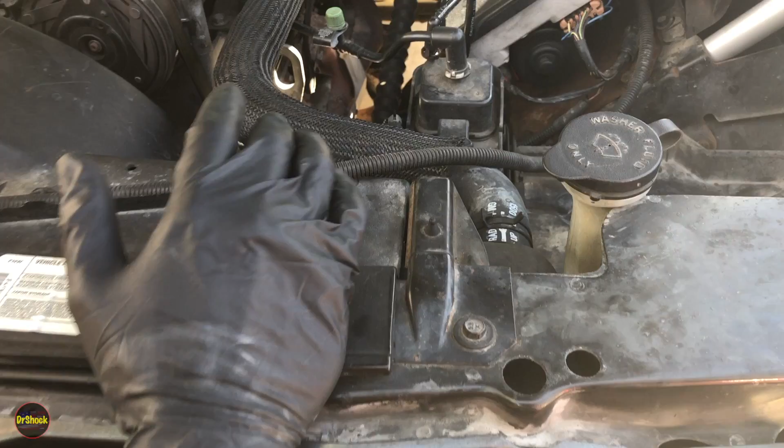All right, guys, today we're going to continue with some of the oil leaks on this Vortec 5.7 liter V8 sitting inside this 98 Chevrolet Cheyenne. What we're going to take care of today are leaking oil cooler lines. If we come over here on the back side of the radiator, you can see what I'm talking about here. So we've got this line that comes out the top of the cooler, and it goes down. You can see it's very heavily caked up with oil.

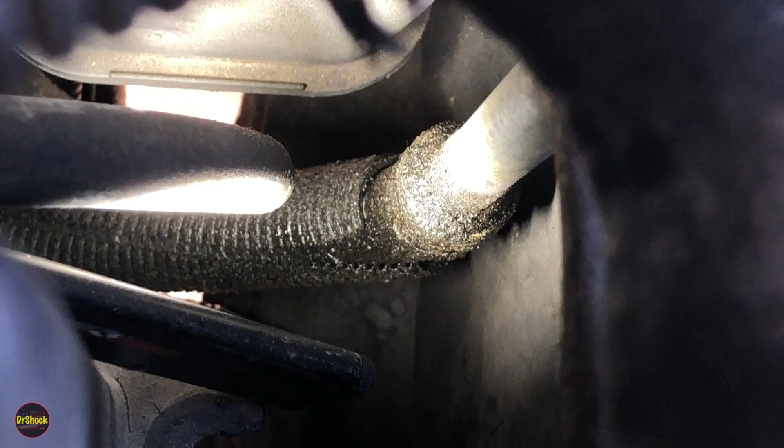There's obviously no other source of oil in this vicinity, so this is 100% a problem with the crimp end of this hose. And of course, I don't know how well you can see it, but this all runs down to the bottom part of the area, and then ends up getting blown all over the engine by the fan. The bottom line is also suspect. Now, what I like to do is replace these in pairs, even if I don't see any direct evidence. So I got enough direct evidence to condemn this one. We're going to end up changing them both.

In order to do this repair, first thing we're going to do is reach back here and disconnect our hood lights so we don't run the power down, because we're going to have the hood up for a considerable amount of time here. I'm going to go grab a 10 millimeter and we're going to take out the 10 millimeter bolts that are up on top here. If we look down inside, we see that there's a couple more 10 millimeter bolts, one here and one over here, I believe. Looking for it. Maybe not. Yep, it's broken off. So there's supposed to be one over there.

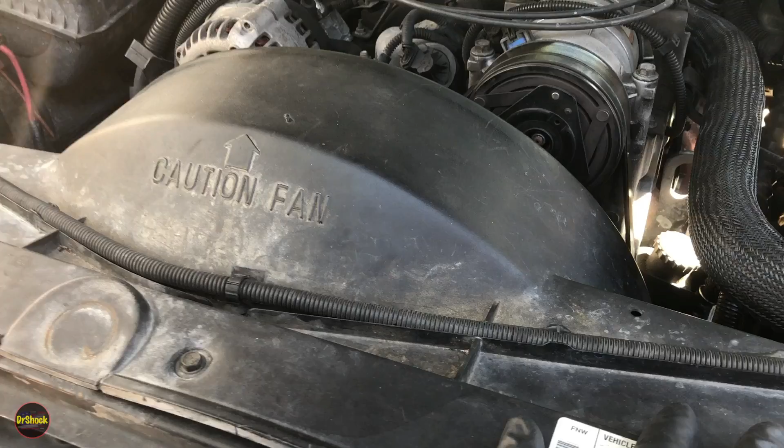That's the other thing we're going to be doing today, is we're going to toss this particular upper cracked fan shroud. It's cracked here. It's missing that bolt over there. I think it's probably missing one on the other side. And we've got a much nicer one from the salvage yard that we're going to replace it with. So I'm going to go grab a 10 millimeter and a small flathead screwdriver so we can pop this clip and we'll get started.

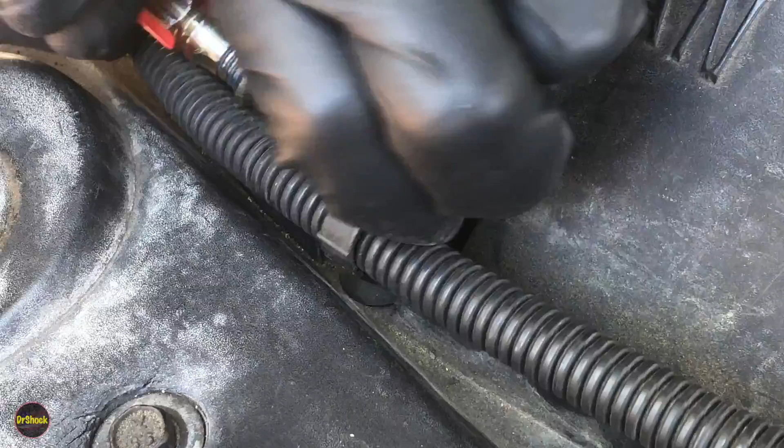All right, so we start with removing this battery cable, popping it out of the upper fan shroud molding. And then we take a small flathead screwdriver, and on these clips, we just kind of work it in here, twist and lift. Right, that's all you have to do there. You can put this guy back behind the AC line right like that. Then we'll take our 10 millimeter and take these bolts out.

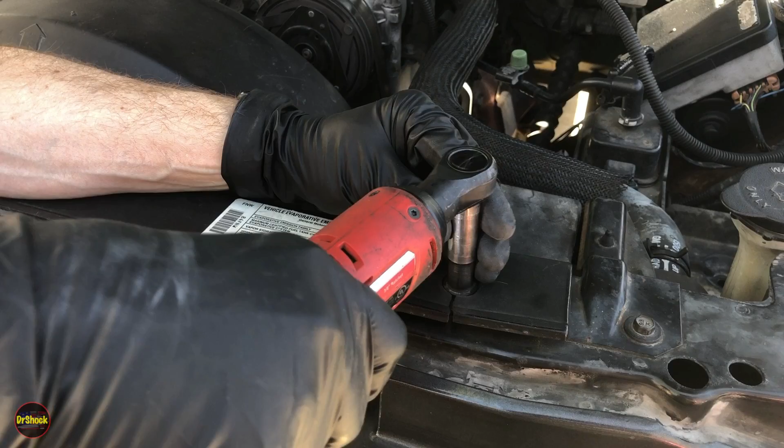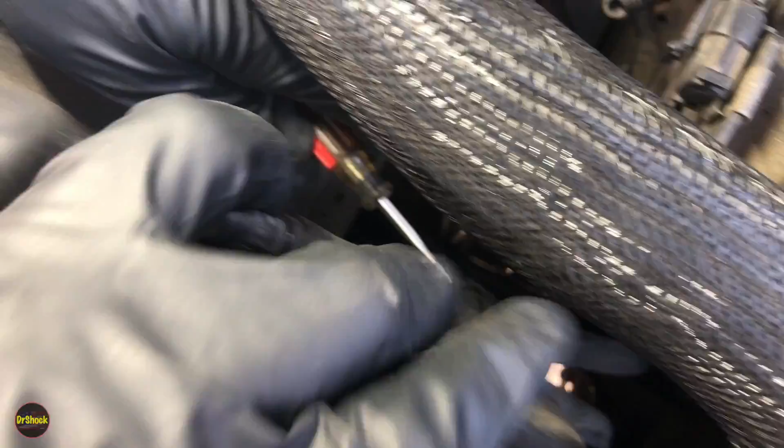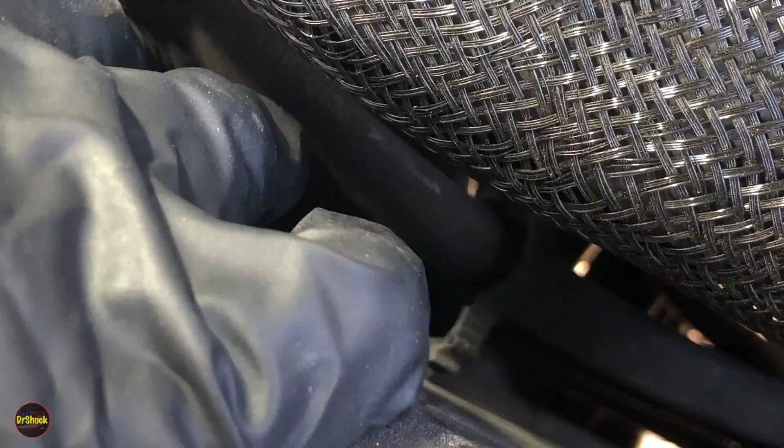All right, guys, we're going to come in here and get the ones that are on the side of the upper fan shroud. But first, some vehicles are going to have this axle vent. It's another one of these small clips, right? So you can see on this side here. Just stick this screwdriver right in there and give it a twist up. That releases this guy. Get him out of the way. And then we'll come down and we'll get that 10 millimeter. Now the other one's broken, so nothing we can do there. We're going to do the same thing on the other side.

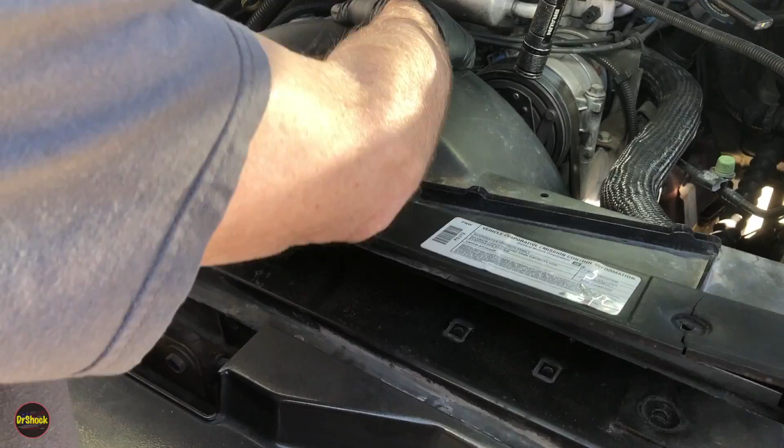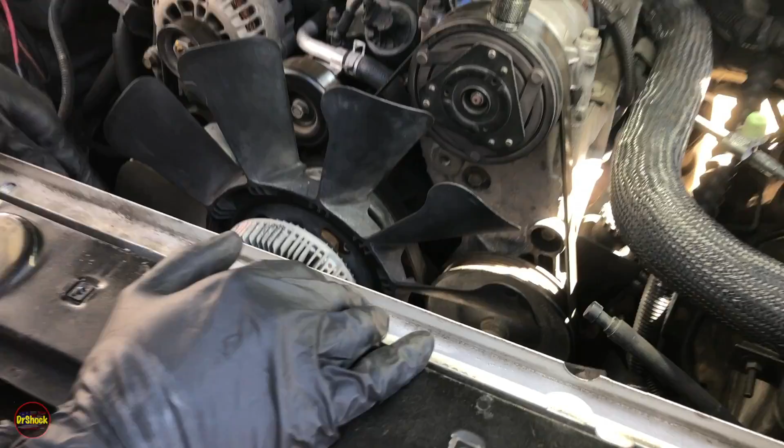All right, with the two bolts on this side and the two bolts on this side and the bolts in the front out, you can remove the upper fan shroud and set it aside. In our case, we're going to discard it and replace it with a better one. We'll show that later. All right, so now we got a much better view of our oil cooler line. And now we've got the kind of access to remove this fitting without touching this upper radiator hose, just the way I prefer to do it. Come in like this. Now we need to get at the lower one.

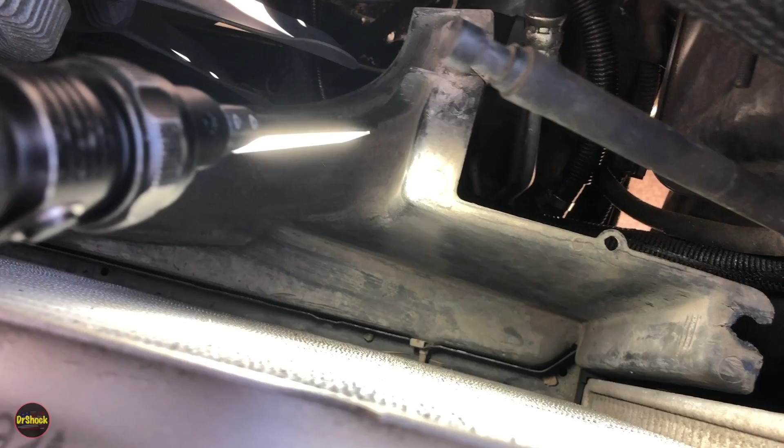So, you could bend this back and have access to that lower fitting right there. But what I'm going to do is go ahead and remove the lower because it's broken here, like we were talking about earlier. And I'm going to have to replace the upper anyway, so I got it off of a salvage yard vehicle. I took a nice set of both, so I'm going to end up replacing both the upper and the lower shroud while I do these hoses.

So I'm going to remove this. It's held on by a 10 millimeter bolt here. You can see the thread sticking through there. We have to access it from underneath.

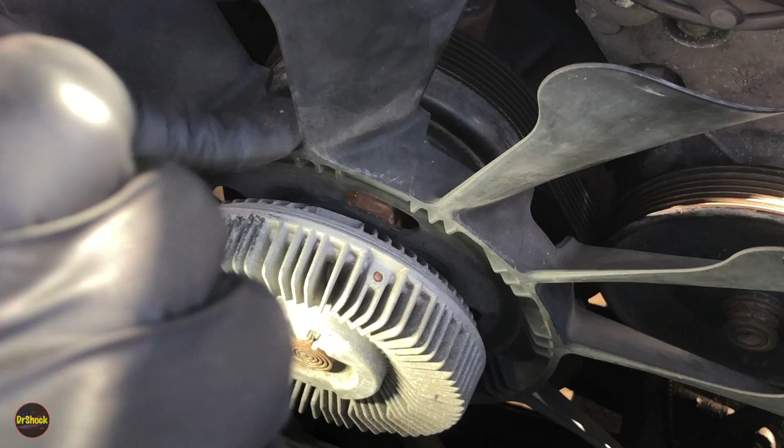And another one right here. Again, we have to access it from underneath, so we'll go underneath and take those two 10mm bolts out. What we'll also have to do before we can pull it out is move the fan out of the way. We'll have to take the fan clutch and fan assembly off of the water pump pulley in order to pull this out. When we do that, it'll give us excellent visibility to both hoses, routing all the way down underneath to the oil filter adapter, where there's a little clip that secures them. So let's go underneath and get these two 10mm bolts out.

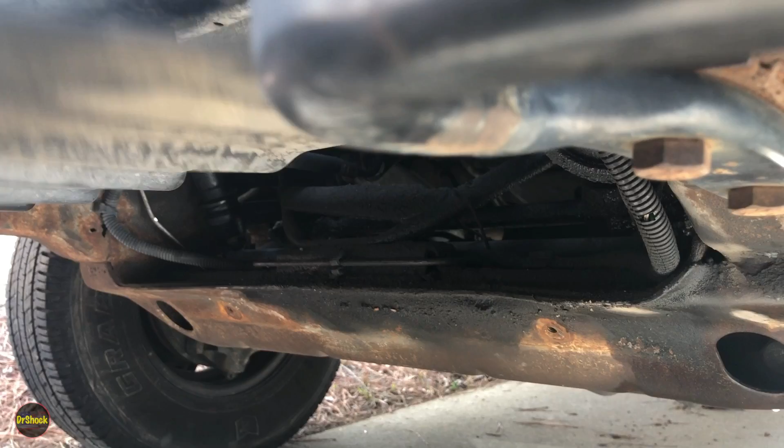All right guys, in order to get access, we're going to have to open up this access panel, and that's held on by a couple of 15 millimeter bolts, one here and one here. So we're going to work those off so we can open it up and get access to what we need. Once you get the last bolt released, this little panel tilts up and out of the way. Now we'll reposition the camera so we can see what's behind here.

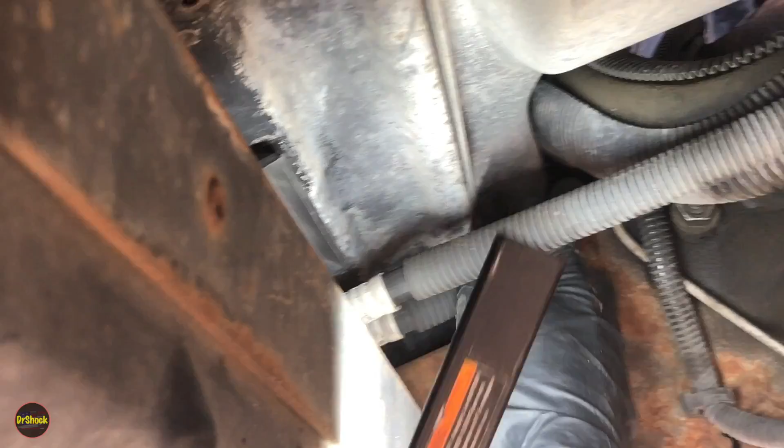All right guys, with the panel open and you pan up in here, here's the passenger side 10mm right there, and here's the driver's side 10mm right there. Now these are easily accessible, but you're going to need to use 1/4 inch sockets and ratchets because of this cramped space. The best tool to get these bolts out, if you have it, is a 10mm box end wrench that has a built-in ratchet. You can get by with a socket and ratchet, but this actually has the best clearance because of the cramped space under here.

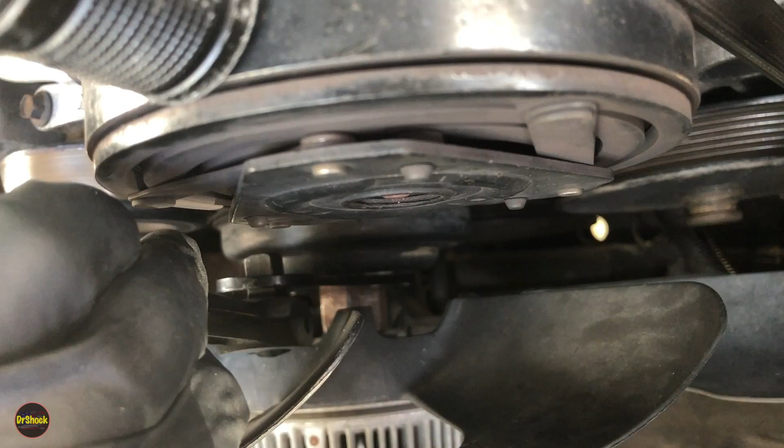Guys, now we need to take this fan off and separate it from the water pump pulley. So I'm going to use a tool like this. There's a lot of different tools you can use, I'm just going to use this particular type. It holds onto one of the bolts of the pulley and then rests against the other one. I'm going to have a helper hold onto this breaker bar, this 1/2-inch breaker bar, for that. And then we're going to slip it in.

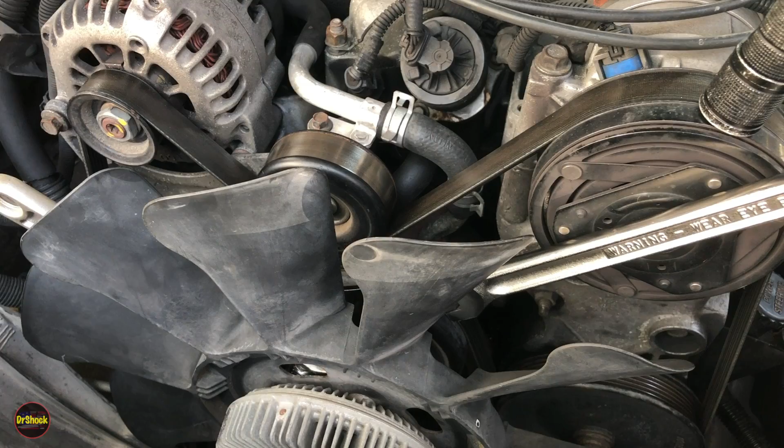All right, so we got that torque broke loose. I don't think we need this other tool anymore, let me get this out of the way. At this point, it should just spin off. There she goes, it's lefty-loosey just like anything else. Lot of threading to do. All right, so there we go.

She's off. Now what I wanted to show you down here, let me set this fan clutch assembly aside for a moment.

We take our flashlight - there's a couple of different tools you can use for this. You can see there's some holes, if you zoom in here, that go into the pulley on these late model small block Chevys like this Vortec V8. The GM tool has a couple of prongs that fit in here and go above one of these bolts, and that's what you use to hold it. The tool I was using is from Lisle - it grabs around one of the bolts and rests on the flat of another bolt. Another thing you can do if you don't want a special tool, although it's hit or miss and can take longer, is put a breaker bar on the tensioner and increase the tension, turning the serpentine belt into like a strap wrench, then give a sharp whap with a dead blow hammer, and sometimes you can get it to come off that way. So there's a lot of ways to get this off. Point is, you got to get it off in order to remove the lower fan shroud.

So let me get some of these tools out of the way. We'll pull the fan shroud out and start getting these hoses disconnected. All right, now that we got the fan off, let's take this guy out. We got a little bit of debris here, so we're going to be a little more contorted than you might have to be - I just don't want all that in there. We can dump it in the grass over here. All right, now with that out of the way, there's our hoses, nice and clear.

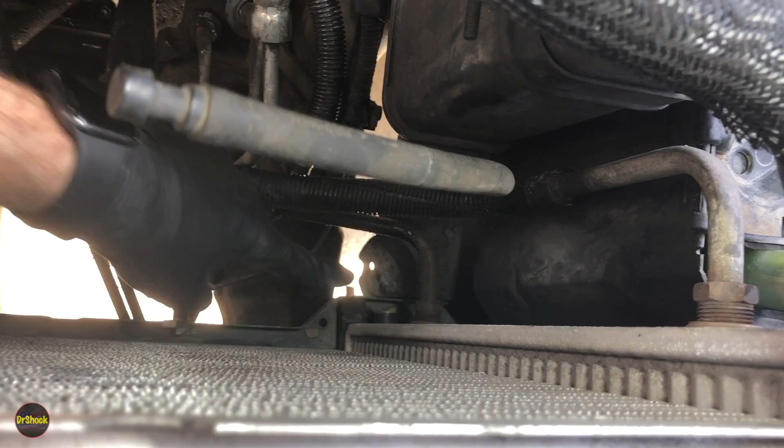Upper, lower. We're going to take these fittings off next. We're going to use a 20mm to get these off. Now, ideally, you'd want to put a line wrench on here, but I don't have a 20mm line wrench, so I'm just going to be using a regular wrench for this.

The other thing you want to check here is that we have absolutely no leakage whatsoever at these fittings, so we don't have a problem with the fittings or the O-ring. And taking a look at the lower hose while we're down here, if we can get the flashlight to cooperate, same kind of thing, right? There's absolutely nothing leaking from these guys. Now, when we loosen them, though, we may get some seepage.

Alright, so it doesn't take much to loosen them up. Just a couple of turns. These are big, heavy-duty fittings. Same thing down here.

I don't know, is the flashlight in your way? Can't ever tell if it's helping or hindering. Now it's definitely hindering because it's hindering me. You know, there's somebody who comes up with a flashlight that will stay where you want it, will become rich beyond their wildest imagination.

Alright, that one's off. And that one's off. At this point, let's go underneath and disconnect it at the oil filter adapter end.

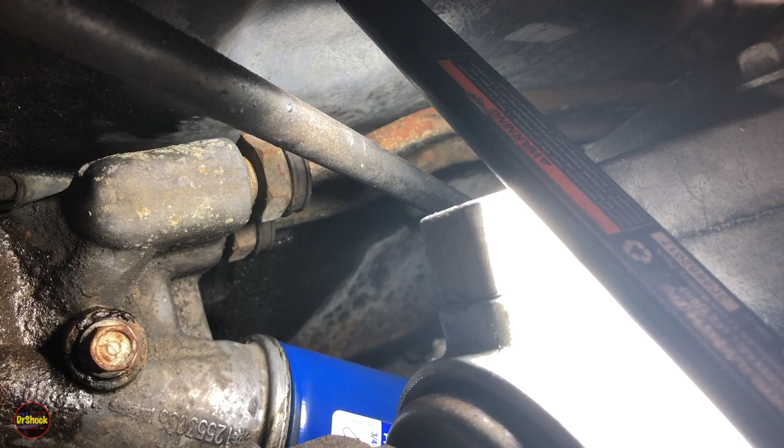Alright guys, we're down here underneath the vehicle, and you can see where the oil cooler lines come into the oil filter adapter. In order to disconnect them, we've got to get these little rubber sleeves off so that we can remove a clip that's on here.

Just let me zoom in here for a minute, and move the camera so you can see what I'm talking about. Right there, these little black guys here, these are going to have to be worked off. I'm going to have to get a longer screwdriver, I think, in order to fit that. If I can get this off without knocking the camera. Yep, this is going to come in from the top, so you guys don't get nauseous.

Alright, just got to get this guy worked back first. Now these haven't been taken off in a long time, so they're on there pretty stiff. Just got to be patient with them. And there they go, so they'll slowly come off. Both of them are the same, so I'm only going to show this one.

Let's see if I can come in from this side. Definitely get your eye protection on and don't be directly underneath this stuff, you're going to have all kinds of dirt and crud falling off. Almost got it off all the way. There we go, alright.

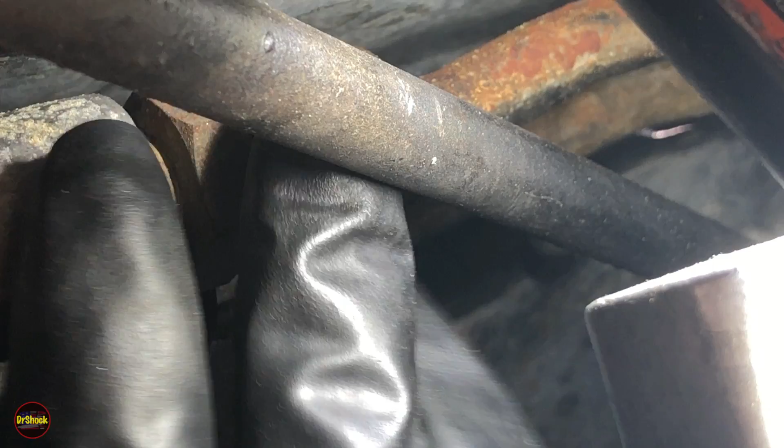Okay, so now we got that clip off. I'm going to move it down out of the way of this transmission brace so you guys can see it. Let's see if we can move the camera over. There we go, you guys can see. There's our clip right there.

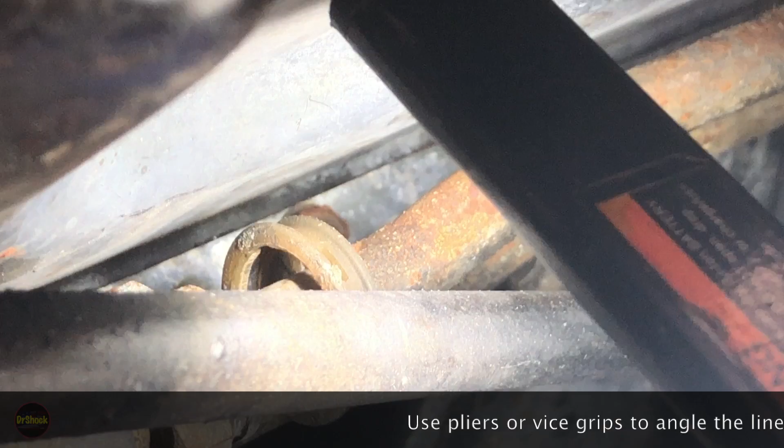All right, so we're just going to work this guy off. Whoop, there he goes, he worked himself off. We're going to do the same thing on the other hose, the other cooler line, and then we'll be able to pull those lines back out of the oil filter.

All right guys, now that you've got the two cooler lines disconnected from the oil filter adapter, we've got this bracket here, this plastic bracket that snaps into this metal bracket, right? Or maybe you call this a retainer. All you need to do is come in with a pair of long nose pliers.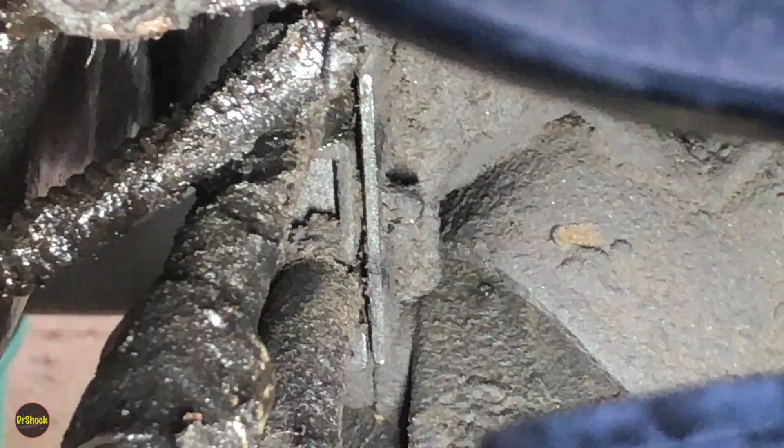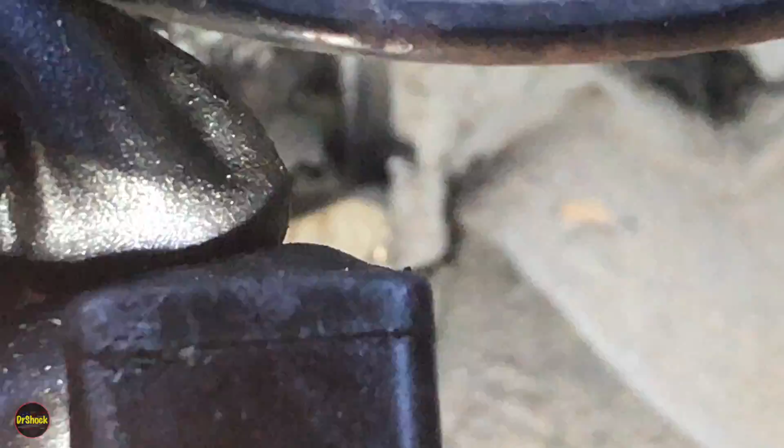Now this one here I think is kind of old and busted. Yours might even be missing. But you would come up here and give it a squeeze right here. There's a lot of crud on it, so I know you can't really see. When we get it out, I'll zoom in. But you're going to give it a pinch, and when you give it a pinch, it'll allow you to push it out.

All right, so if we pull it up here, you can get maybe a closer view of this. All right, so you're just going to push this out so that it lets go of that metal bracket. And now we're ready to take these two lines out.

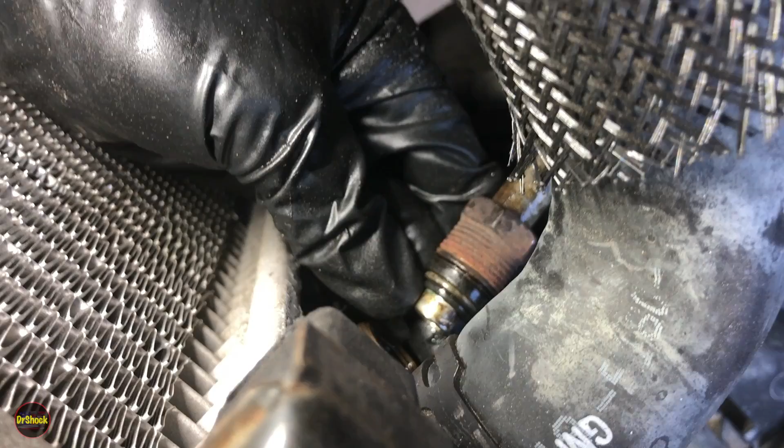All right guys, as you get ready to remove these lines from the cooler itself, just make sure that you're getting the little O-ring coming out. If you don't see the O-ring on the pipe, it's stuck inside, and you're going to have to fish it out. You got to make sure you do that, because if you try to put two O-rings in there, you're going to have leaks galore. All right, so we got this guy out.

We got this guy out down here. We're going to have a little bit of leaking until we get situated. But at this point now, we can grab both of these, and we can just fish the whole assembly out.

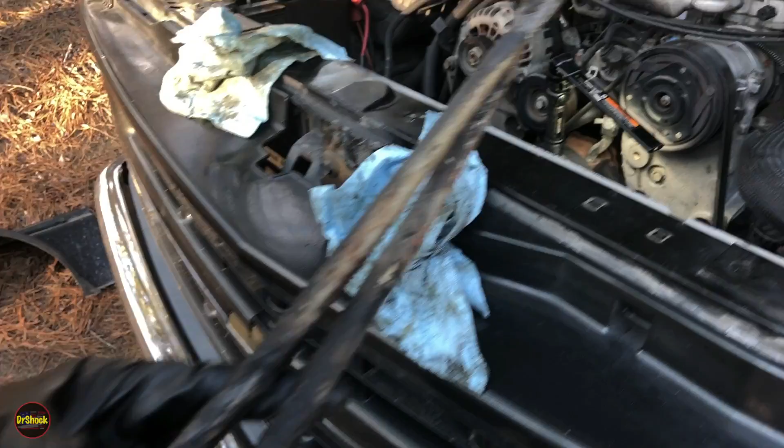All right, so here's what I was trying to show you in the earlier clip. This little guy here just snaps on to the pipes, and then he snaps on to that metal brace, kind of clips on. Now if you're missing this, or yours is broken, I'll put the part number in the description.

So we can see these lines were leaking very massively. I'm convinced now that both of them were leaking. I let this go for a while, probably let it go for too long. Now it made a bigger mess to have to clean up. Let's go take a look at our new ones that we're going to put in.

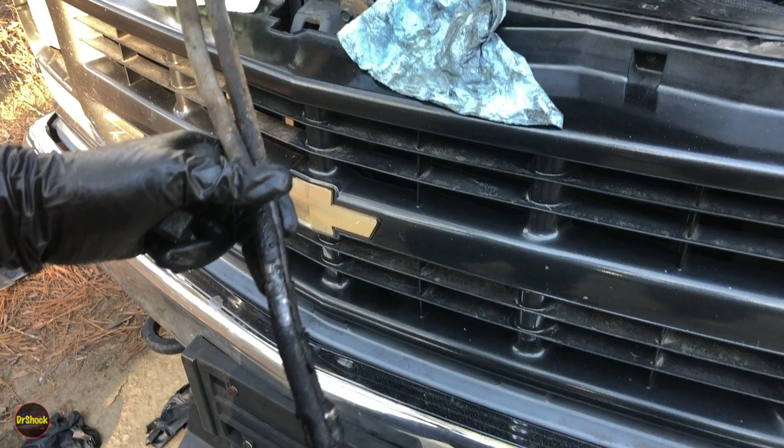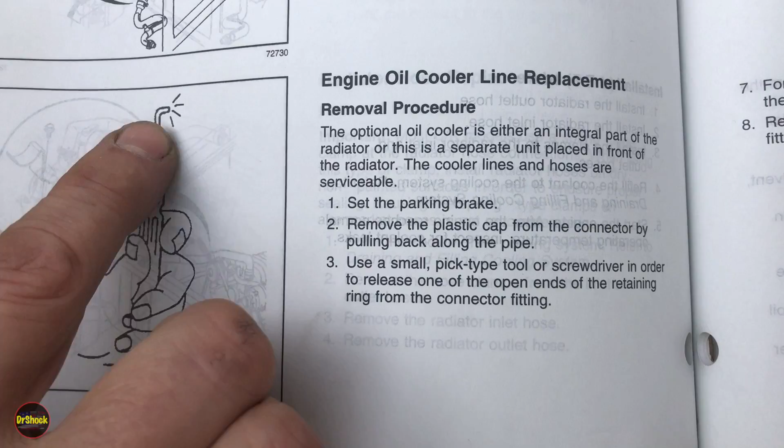All right, just a quick view from the service manual, guys, for this particular truck. So they talk about having a 90-degree angle pick. I used a slightly different one, but it's the same deal. They show you over here about getting underneath and lifting out the clip.

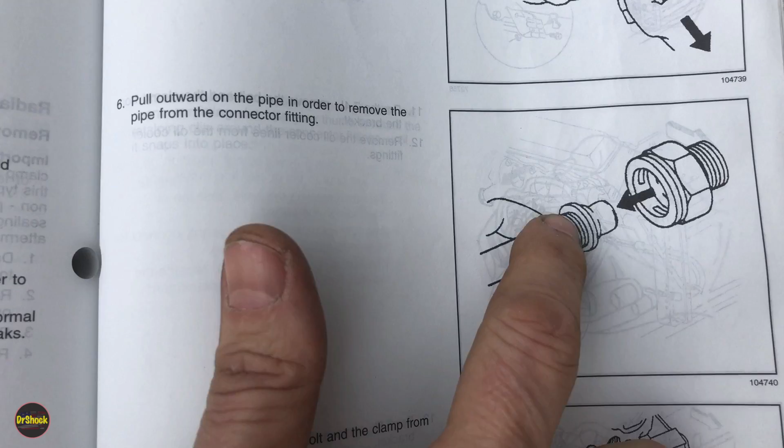And of course, remember to discard the clip, you need to put a new one on. Then they talk about pulling it out. I find that you have to wiggle it to let it go. If you find it's really rusted in there, you might put some pliers with nylon teeth so you don't scratch it, and just kind of lever it out. But in my case, it wiggled right out.

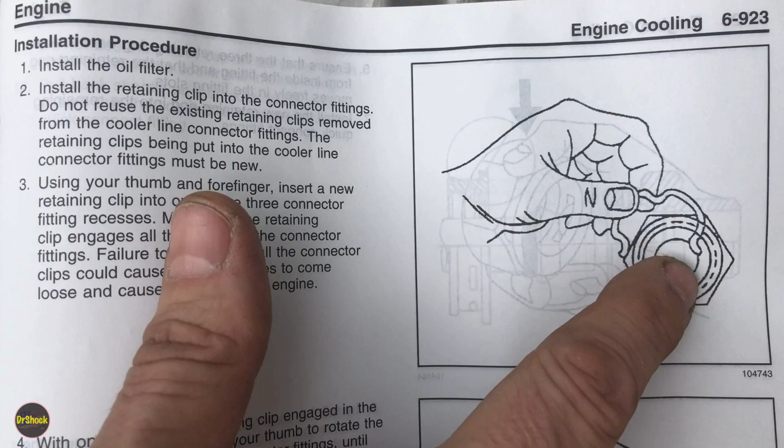And then they talk to you about putting the clip in. What you're trying to do is, after you get the yellow ring pushed in, get those slots to line up with this curve on the clip. And of course they give you some instructions here in text, and show you another view here.

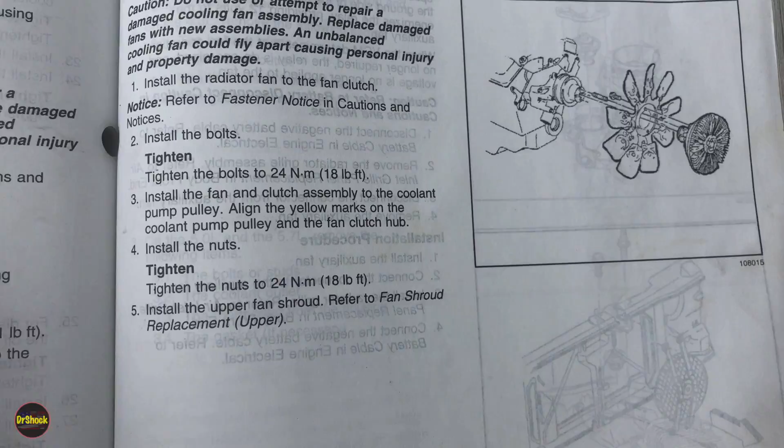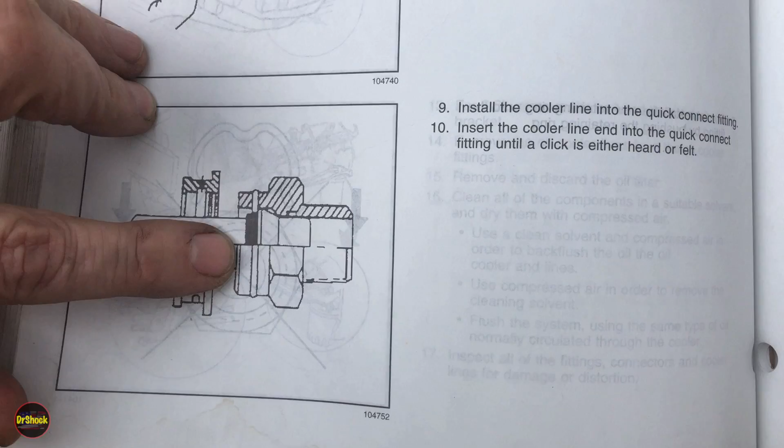Obviously this is a lot easier when it's in your hand versus under the truck. And they talk to you about the clearance you want to see before you push this plastic cover over the clip when pushing in and removing the pipes. Here's another view of it going in, and here's another view after you've snapped the ring on to retain it. They're also telling you to make sure this goes on all the way, and then we were able to push the black cover over it.

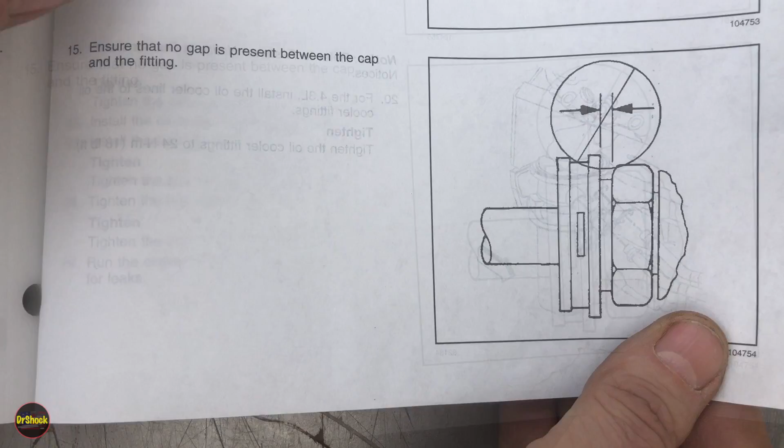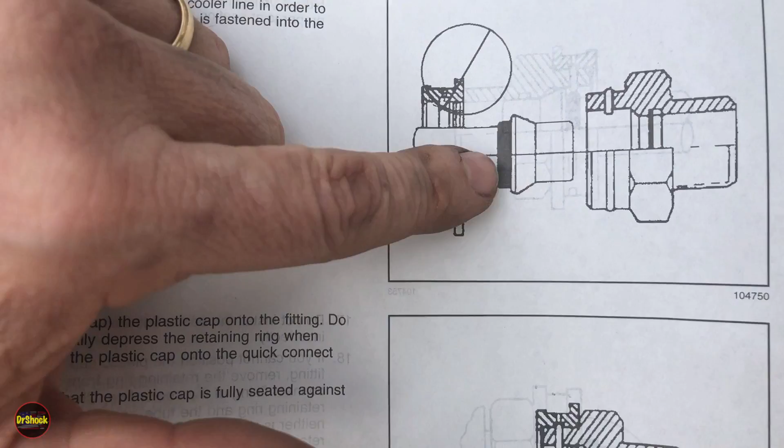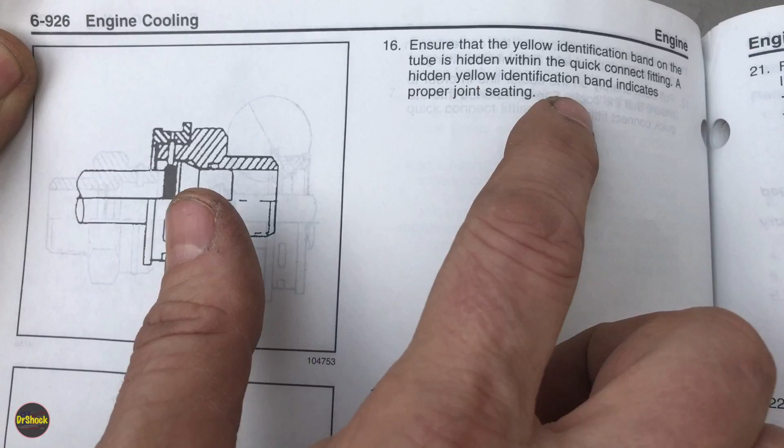That's another indication that the yellow paint, shown here as black in these pictures but actually yellow in the real lines. You want to get that all the way in so you can see through these slots and see the yellow paint. They mention ensuring that the yellow identification band on the tube is hidden within the quick connect fitting. A hidden yellow identification band indicates proper joint seating, so you definitely don't want to see it sticking out.

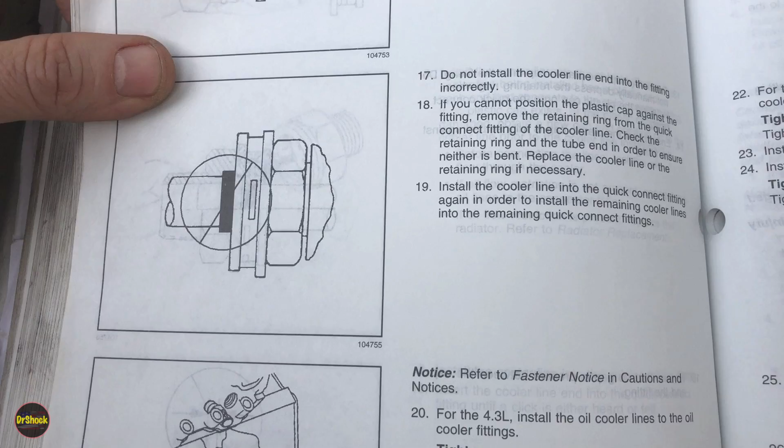If you happen to be changing the fittings, they mention what the torque spec is. We didn't change the fittings, but I'll show you that torque here in case you do. Again, you need to use new clips.

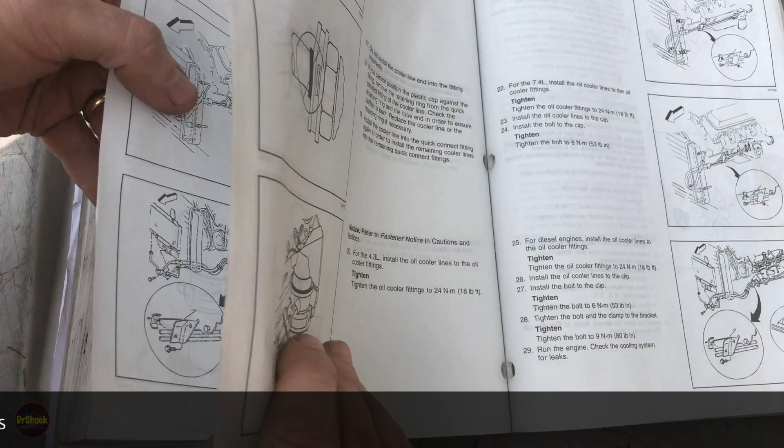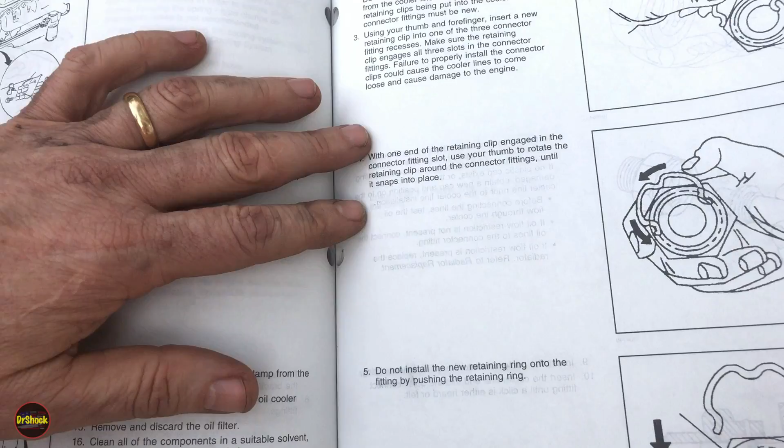For you guys that are doubters, I believe they make an explicit comment: discard the retaining ring clip, and during installation, do not reuse the existing retaining clips removed from the cooler line connector fittings. You have to use new ones so the spring tension is good and tight.

Anyway, I just thought I'd show you this. It comes out of the 98 second edition service manual, which is fine for all these OBS GMT 400 type trucks.

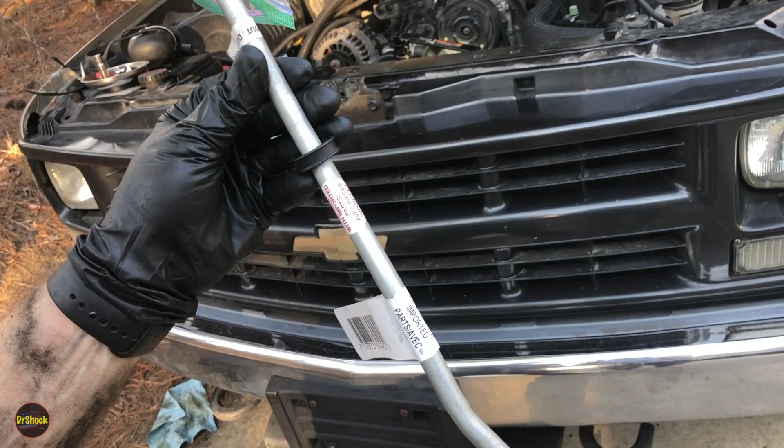Here's our replacement outlet line, GM part 15112870. It'll be marked output or input depending on the line. I've got a rubber-banded Ziploc bag here so when we fish it in we don't get any crap inside the line itself. You can see there's a new plastic piece that'll go over the clip when we reinstall it, and it comes with a new O-ring on the end.

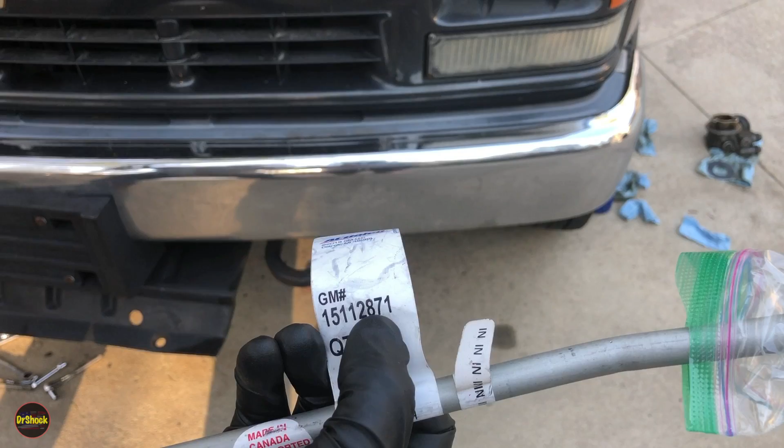This one here is part number 15112871, and this is the inlet. Same deal — put something over the end so you don't get crap in there. It'll also have a new plastic piece that slides over the clip.

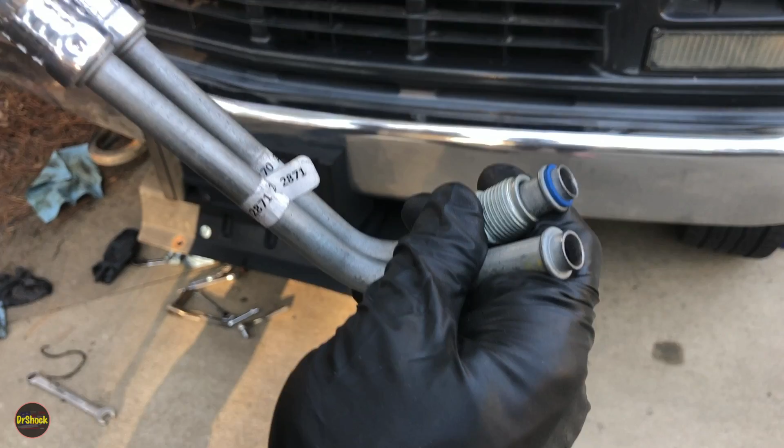It had a new O-ring on it, but I think I just dropped it, so I need to go track that down. I just saw it a few seconds ago — must have knocked it off. But make sure you end up with an O-ring on the end. On these new ones, they're typically blue, but they might be black. Let me go find that O-ring and then we'll get this installed.

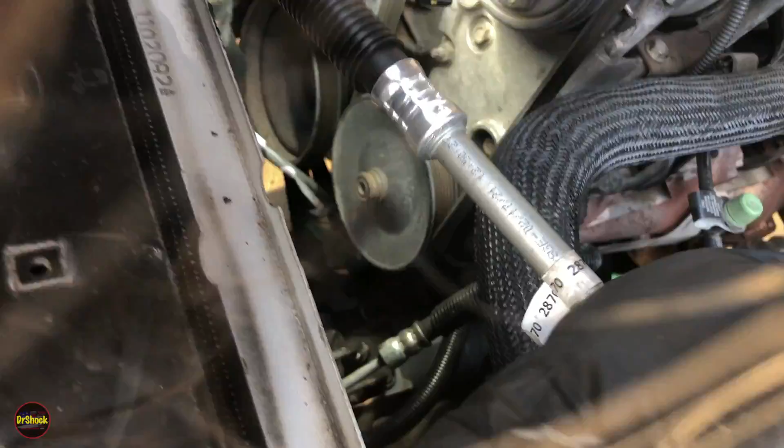Let's put the outlet in first because that's the one that goes on the bottom. Remember to have something to keep the crud off the end, and we're just going to route it back down the way it came out. Sometimes you might encounter some resistance — you might have to go underneath and see what it's hitting against.

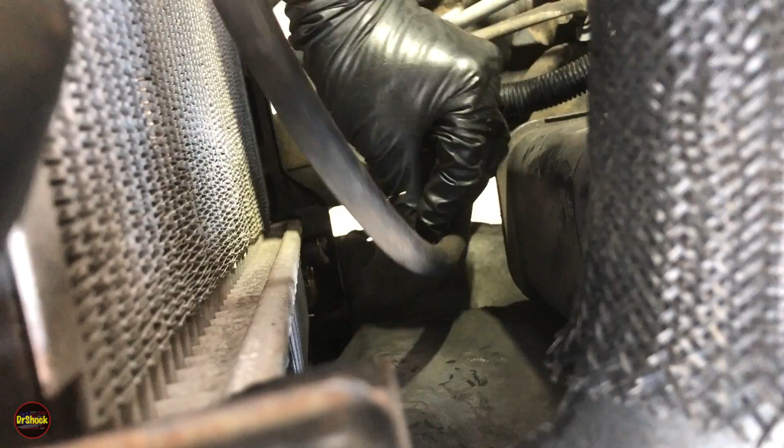Over on this side, again just make sure your O-ring is okay. What I like to do is get a little bit of oil from inside and put it around the O-ring, then go ahead and get this guy started by hand. If it's not going in good, that probably means it's not seated properly. Once it starts going in by hand, you can grab your 20 millimeter wrench and go ahead and snug it up.

We won't torque this one yet — we'll just get it snugged up, then go through and make sure it's lined up at the end of the oil filter adapter, and then put the inlet on top. After that we'll come back around, snug these up, torque them, and then go ahead and insert these and get them clipped in. So let's go underneath and see how it lines up with the oil filter adapter.

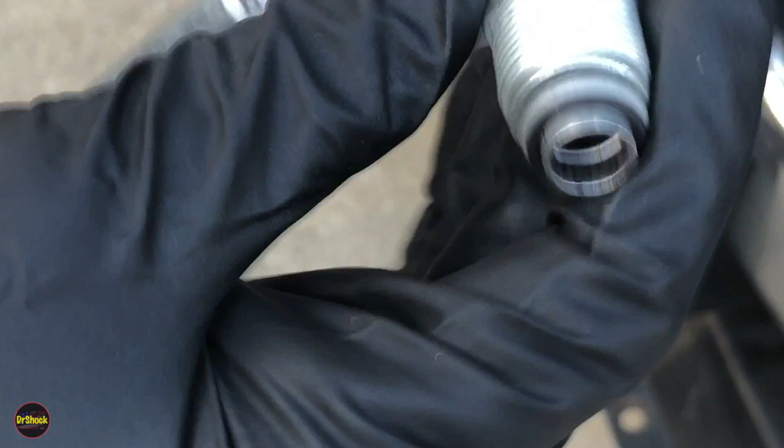We found our O-ring, fortunately. If you end up losing yours or need extras, I'll put a part number down in the description where you can pick these up — they're still available. Now let's go ahead and get the inlet line, which is the upper line, installed.

Similar to the other one, we're going to fish it down where the other line goes. You might want to have a helper for these steps because you need to get both lines fished in above the transmission brace. I'm kind of doing it by feel here, but you can always go back underneath and check.

Now we're going to put this one into the oil cooler on the transmission. Just like the bottom one, let's see if I can get a little bit of oil out of here to lubricate our O-ring.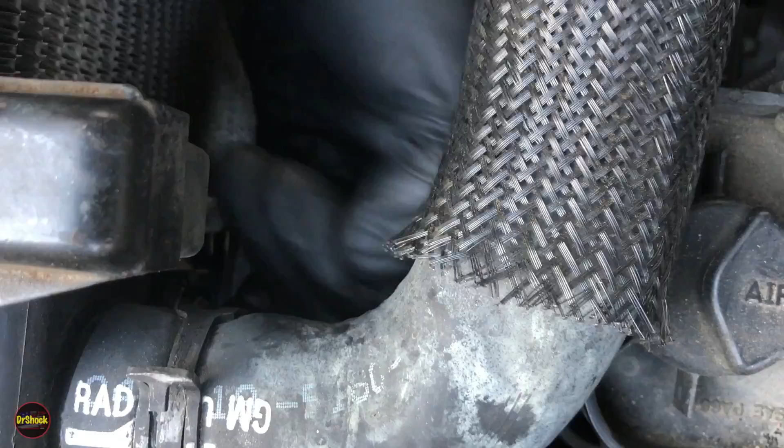Just a little bit will do up here. We're just trying to get a little bit of the residual oil on our O-ring. And then just like we did with the lower, we're going to feed them in, and then hand start the 20 millimeter fitting.

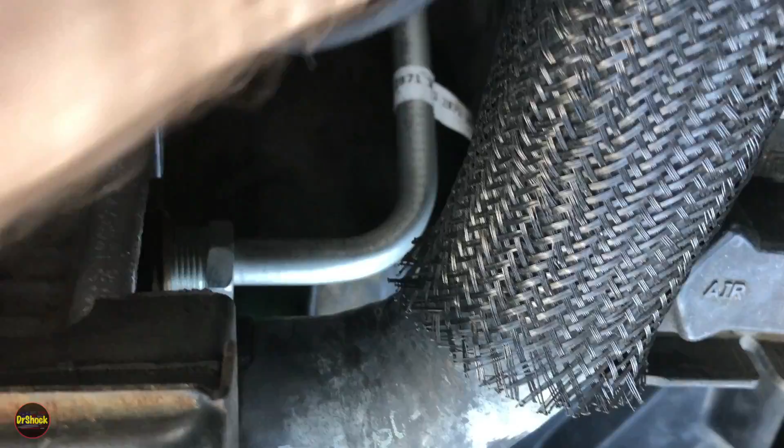We're going to put him down into position, right? He goes in this down direction. Let's fish our axle vent out of the way and get him over there. So you kind of hold him roughly where he's going to go, get your 20mm wrench, and just very lightly snug it up.

We're not looking to be finished yet because we still have work to do underneath. We just want to stop any more residual leaks out of the cooler until we're done underneath. So once it's snug enough to hold it in position, we're done up here and we can return down to the cooler area and continue hooking things back up down there.

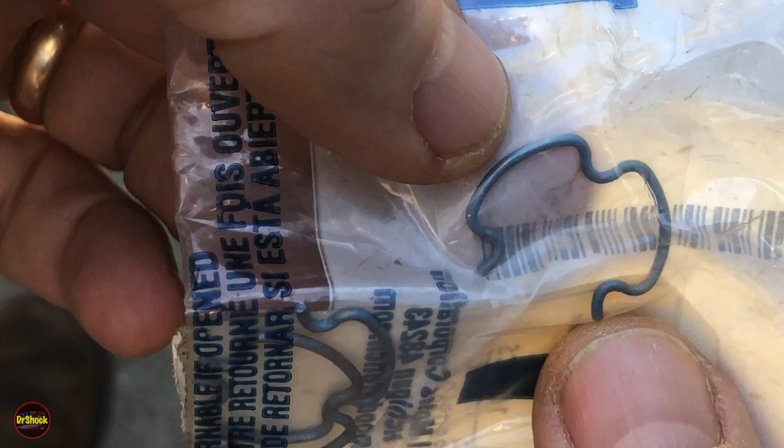All right, another part number you're going to need is this: 15724727. When we install the new pipes, we're going to need to replace the retaining clips that hold them into the oil filter adapter. So when we go underneath, I'll show you how you get these on - kind of just roll them on with your thumb. I'll also show you some pages from the service manual to help explain how that's done. So let's go on and get them installed.

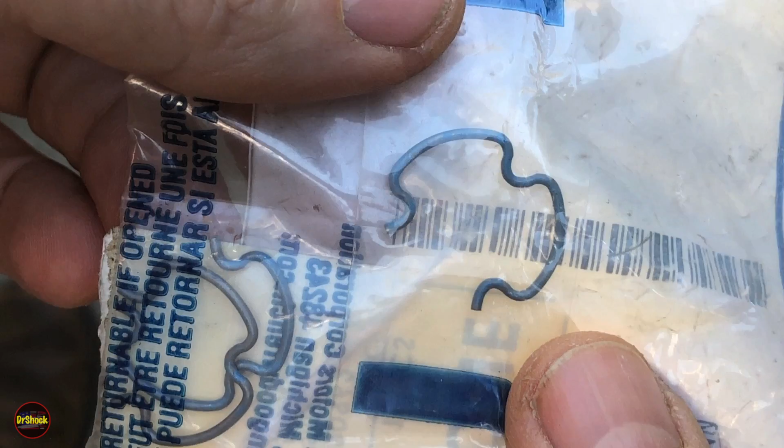All right guys, you can see we've got our new clip installed on the outlet line. We haven't pushed this one in yet, right? Just got it kind of sitting there. And one of the things I want to point out, if I can bring this one down here just a little bit, you can see if we zoom in - hopefully you can see - there's a yellow paint band that'll be on the end of these.

It'll be in the inlet and the outlet. And the idea is that after you get the clip in, you just push this guy in until you don't see the yellow. The yellow will end up disappearing underneath the slots where the clip is sitting in. Now I'm going to try to reposition this and show you me putting the inlet pipe clip in. Hopefully that's a good angle for you.

So you've got 3 slots, right? Here's our new clip right here. And what we want to do with this clip is get it inserted into the 3rd piece, right? Push it with our thumb and roll it around until it snaps in like that. Let me move the flashlight here so you can see a good view of how it is situated.

Right, so now, lots of shadows in here guys. Sorry, maybe this view - you can see it sitting right inside that top notch, and then the 2 hooks are on the other notch. And then if we take our inlet line, push them back just for a sec, get them lined up with that, we can again see that yellow paint mark.

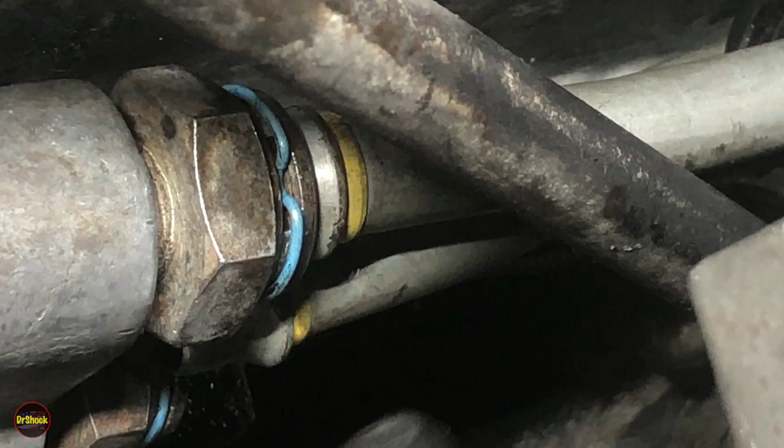So I'm going to have a helper push the outlet line in here. Let's see if we can get a good view with the flashlight here of that one. All right, go ahead and push that in. Just kind of wiggle it. Push. Gotta give it a good hard push. There it goes - now you heard it pop. That was it sliding in.

So if we take a look at the inlet, just to compare for a moment - I'm trying to get this where it'll rest where you can see it there. Maybe, yeah, like that, like that. So we can see here, right here in the upper left, the inlet pipe. It's got a bit of a flare to it. And what will happen is as you push it in, it'll push the clip out until the clip pops behind the shoulder, and that's what locks it into position.

All right, so since we got the outlet done, we can go ahead and slide this black cover over. And the other thing, if you remember from the service manual, we want to make sure that we don't see any gap. So now we're going to take our inlet pipe and position it. Let's see if we can get you guys any better of a view here.

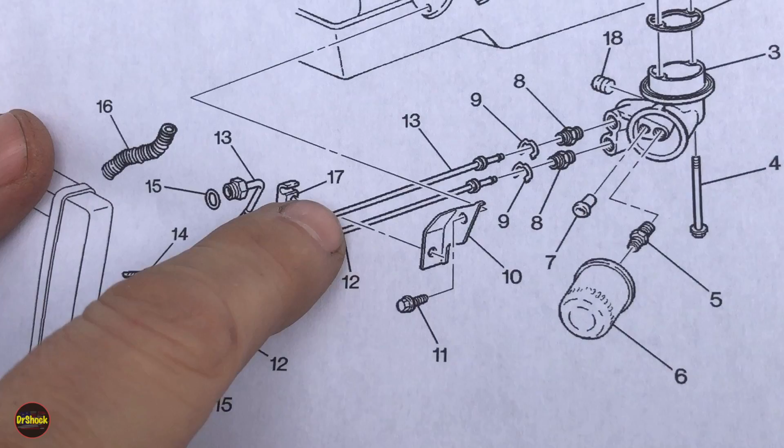Guys, here's a printout just showing what we've been doing here, right? So we've got our 2 lines, we've got our clips that go into our oil filter adapter, and then we showed removing this little plastic retainer that goes into this metal bracket. Here's our O-rings on the ends of our lines, and the service manual also shows the factory did a little zip tie to keep these guys close together.

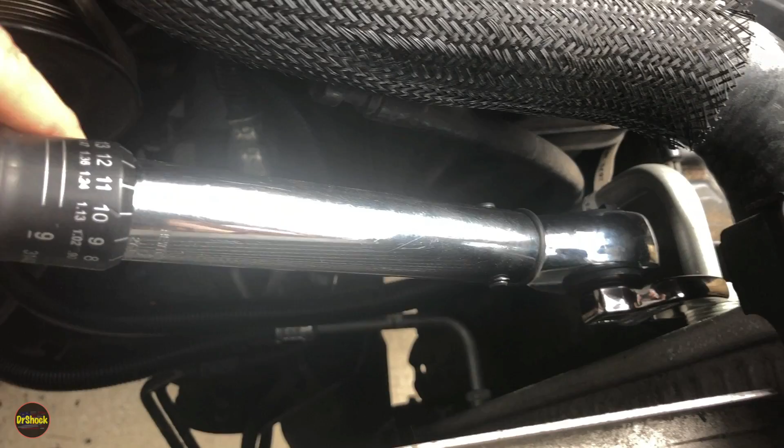With this point, we're ready to torque this down. So if we take a look here, we've got our clip in, and we're going to come in here with a 20 millimeter crowfoot, and we're going to get this guy to 18 foot-pounds. I already have done this, right? So I'm just double checking, or 25 Newton meters.

Now once that's all done, we're going to clean this up with some brake clean. All around here, wherever you had dripping. We're going to do this all around the oil filter adapter where we connect the lines, all along where the lines run, along the oil pan, all along that bracket where we have the plastic retainer, because we got to get all the old mess off in order to be able to tell if we've fixed the leaks, right? So we'll let this sit and evaporate. We'll go ahead and fire the engine up without the fan on just to test for leaks, and then we'll put the rest of it together and come back.

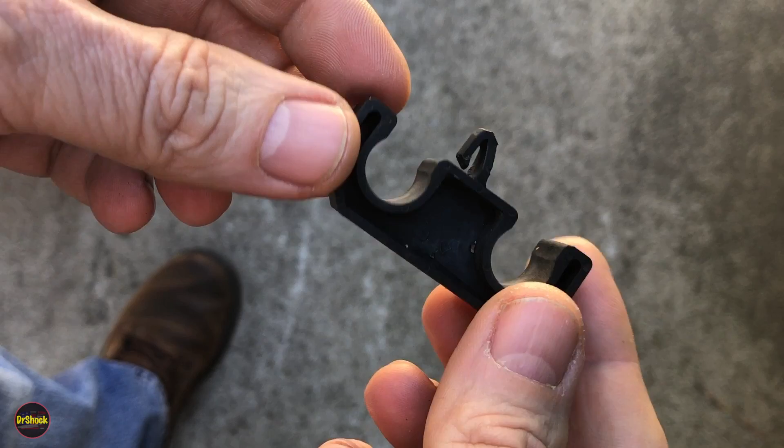All right, guys, here I cleaned up that bracket that's used to hold the pipes. I guess it's called a clip, and it attaches to that metal bracket. And we can see after we've cleaned it up that one of the prongs is broke off. So we're going to need to replace this part too.

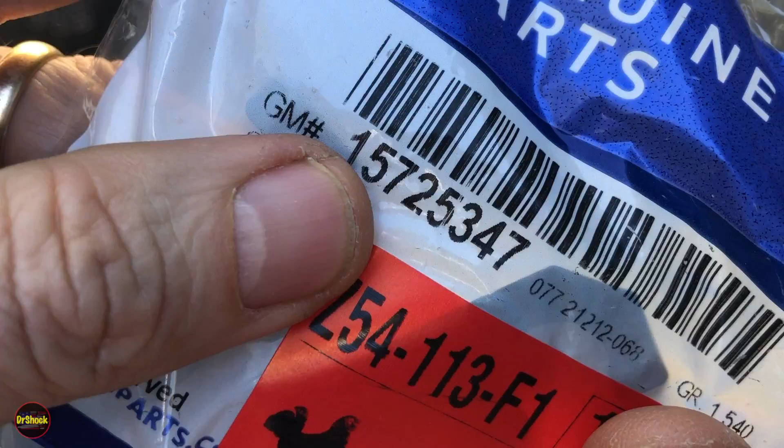I'll put that link in the description, but just to show you the new part here, this is what it's supposed to look like, right? Kind of a slightly different design, maybe, because it's kind of squared off on top versus the original one. But the point is you're supposed to have 2 of these to hold it on. And the part number of that guy is 157-25347. So let's go ahead and snap him on and retain those pipes.

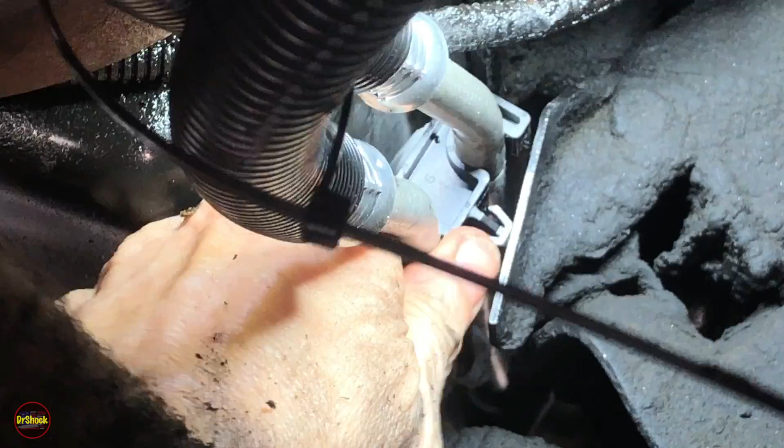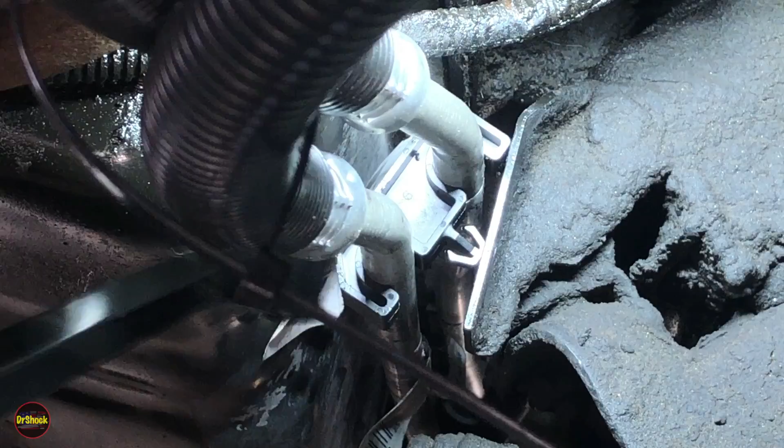All right, guys, we're going to snap it on the bottom one. Push it forward so it lines up with the hole in the bracket. And then we're going to get it to snap in the top one. All right, we get it snapped on the other pipe, and then we can push it down with a pry bar. Just to get it where it needs to be. Until we get both of those little tabs in there.

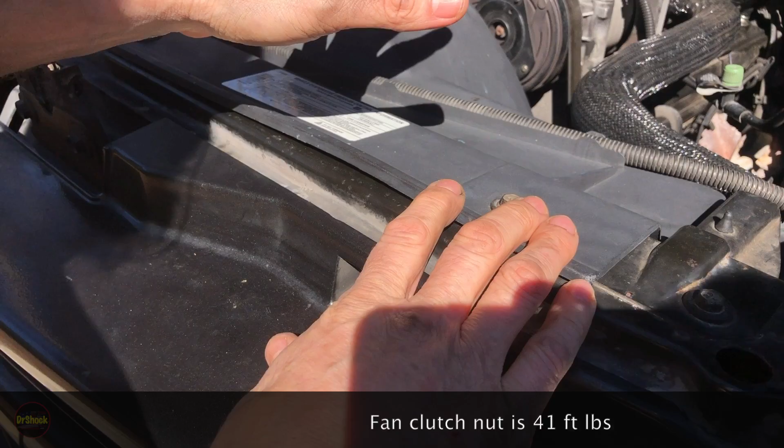We've got our shroud back on, top and bottom. Everything's clipped and bolted in. These 10 millimeters that hold the shroud all around, top and bottom, they're 71 inch-pounds, but I'd recommend you don't do that torque. This type of plastic's gotten too old, and when you torque it down, that's what causes it to crack, which is why we replaced it while we did this repair. But everything's done, and we've tightened everything up here, and we ran it, and we don't have any leaks, so we are done. I hope this helped you out.